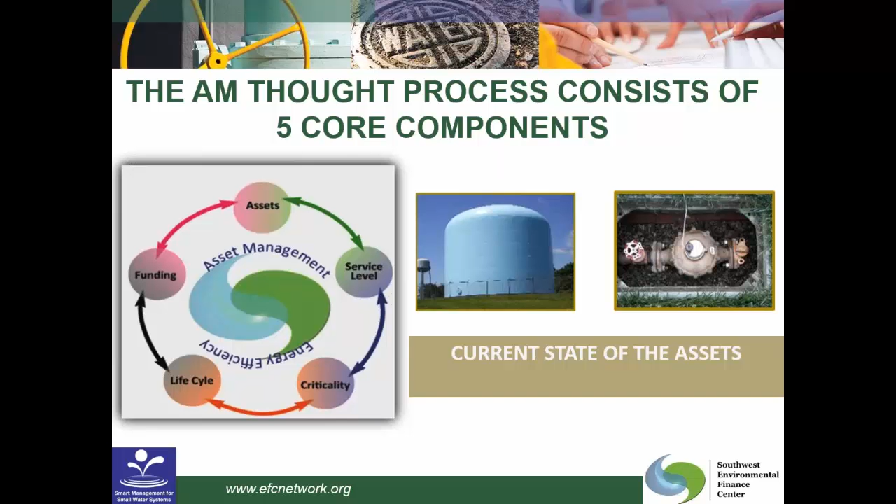The second core component of asset management is level of service. So when we think about a water utility, oftentimes we don't think about it in the sense that water utilities are customer service businesses. But we are. We're in the business of serving customers. So defining what levels of service we aim to provide to our customers is really very important. So defining those levels of service that the utility plans to provide defines the goals of the utility and how we're going to operate. The goals allow you to communicate with your customer.

Part of that communication should include the explanation that if the customer desires a higher level of service, typically the costs are going to be higher. The two are directly related. The level of service becomes the utility's roadmap, guiding you in your decision making. So as you set the goals and as you know what your targets are, when you're making decisions about where to spend your money, about how to operate your system, these goals are going to put you in the right direction.

And when you're defining your level of service goals, we like to say that they should be SMART goals, with the acronym of SMART. So specific, measurable, attainable, realistic, and time-bound. This will allow you to track your progress towards meeting those goals and to be able to report the progress that you're making to your decision makers, to your funders, to your customers.

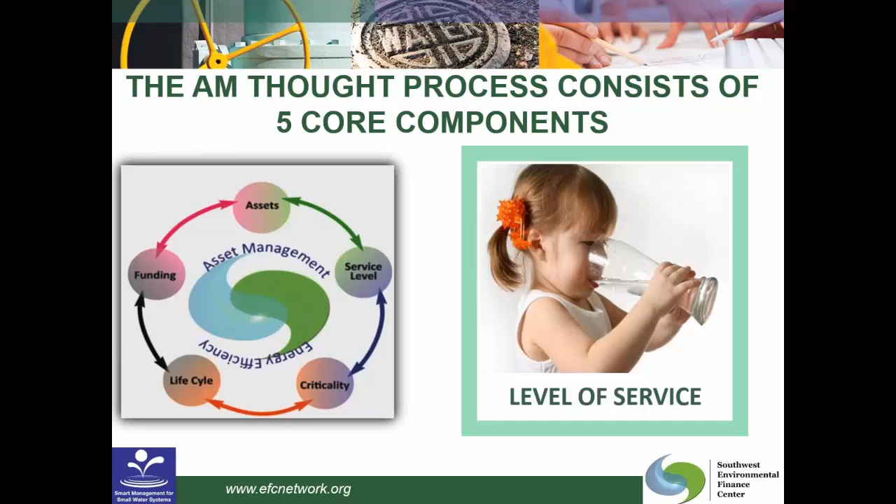The third core component of asset management is criticality. So we know that not all assets are of equal importance to our utilities. Some are very important to operations and some are not. So for example, a small water or wastewater pipe that serves a few houses is probably not going to be as important to a utility as the single pump that supplies the entire water system. If the single pump would fail, the whole town would be out of water. So it's important for each utility to determine which of its assets are the most critical.

When we talk about criticality, the two components that you want to look at are the likelihood that a given asset will fail and the consequence if the asset were to fail. So whenever we look at those two questions, we have several considerations that go into the determination. So for likelihood of failure, we would want to consider things like the condition of the asset, the age of the asset, repair history, historical knowledge, operation and maintenance history.

And then for consequence of failure, we would want to consider the cost of the repair, the social impacts, costs associated with the failure, cost related to collateral damages, legal costs, environmental costs, reductions in level of service, and any other costs or impacts that are associated with the failure.

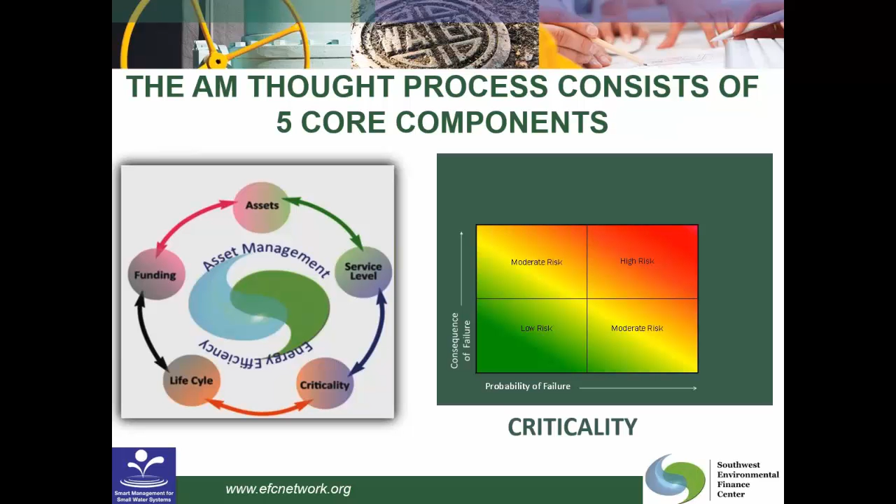You can reduce the consequences if you have redundancy in your system. If there are redundant assets, if one asset fails, another one's there to fill in for it, so to speak. So in this manner, the consequences are reduced because the failure of one of the assets won't cause a significant problem. And we'll be talking about the considerations that go into determining asset risk more here in just a few minutes.

The fourth core component of asset management is lifecycle costing. So traditionally, whenever a utility looks to replace an asset, only the capital cost or the cost to purchase that asset is considered. But there are other costs that the asset will cause over the life cycle of that asset, and those costs typically aren't considered, but they include the cost to operate the asset, to maintain it, to repair it, if any specialized training is needed, so on and so forth.

So analyzing life cycle costs helps you know when to continue with maintenance and repair efforts, and when to take the significant cost of investing in a new asset. So we don't want to spend too much by doing more of maintenance or replacement than we should. We want to try and balance those out. So a lot of times we're actually not doing maintenance at all. Our funding is limited and maintenance tends to get cut from the budget.

If your utility is not funding any type of maintenance, you've put yourself into a completely reactive mode waiting for something to break. And it's been shown that if you're operating in reactive mode, you're actually operating in a way that's costing you 3 to 4 times more than if you were performing maintenance. So it's possible to justify putting maintenance back into your budget. And as you go through asset management and you look at the costs, it will become very apparent that investing in maintenance is a wise decision.

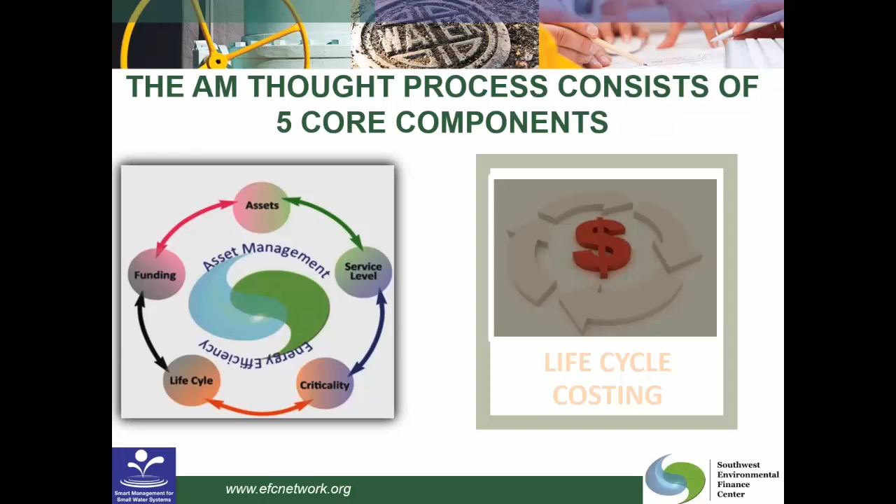It's not possible to have a system that's 100% planned maintenance and no reactive, as ideal as that would be, but a good goal is to be about 70% proactive and about 30% reactive. So I have a question I'd like you to consider. If an airplane was maintained the way you maintain your water facility, would you fly in it? If you answer no, think about why that's the case. Maybe we're not doing enough maintenance.

The final core component of asset management is long-term funding. Once you've determined what assets need regular maintenance and replacement, you have to determine how you're going to pay for those items over the long term. You have to determine your funding needs for your day-to-day expenses, for your operations and maintenance, and for your long-term capital expenses for your large replacements. And then you have to determine where that money is going to come from. So the money can either come from internal sources, your rates and fees that you charge to your customers, or from external sources, and those would come in the form of grants or loans.

So the EFCN has several funding tools and resources available on our website, and the web address is shown at the bottom of every slide. These include funding tables that list funders for water utilities by state, and then there are several other tools and guideline documents. There's the Financial Health Checkup for Water Utilities tool. There's a Plan to Pay Scenarios to Fund Your CIP tool, Water and Wastewater Rates Analysis Model tool, and Designing Rate Structures that Support Your Objectives, which is a guidance document. And there are several other references and resources available on the website specifically about funding.

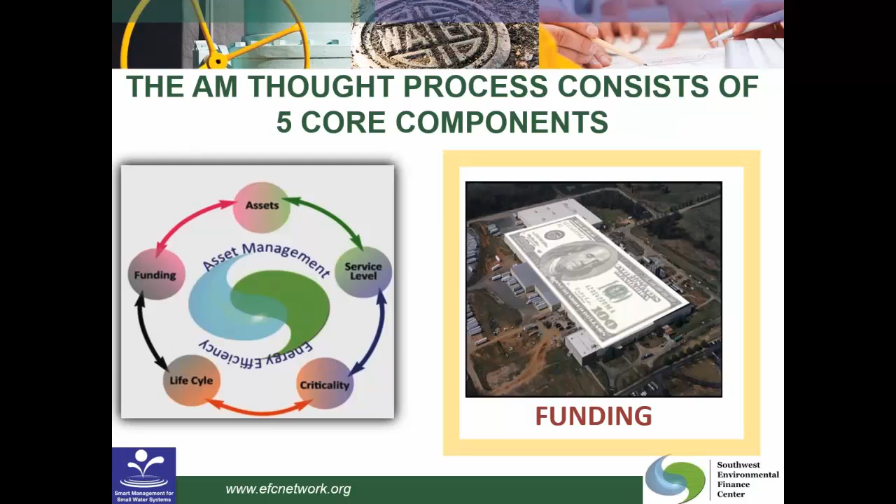So now that we've taken a quick overview of the 5 core components of asset management, we'll get into our risk analysis discussion. So you have an inventory of assets. You have any number of assets that you have to take care of to keep your water system functioning. You have a limited budget, and you have limited resources to deal with those assets. So how do you pick which activities you should do first? How do you prioritize? You have to determine which of the assets are most critical. But how do you go about doing that? You use your risk analysis.

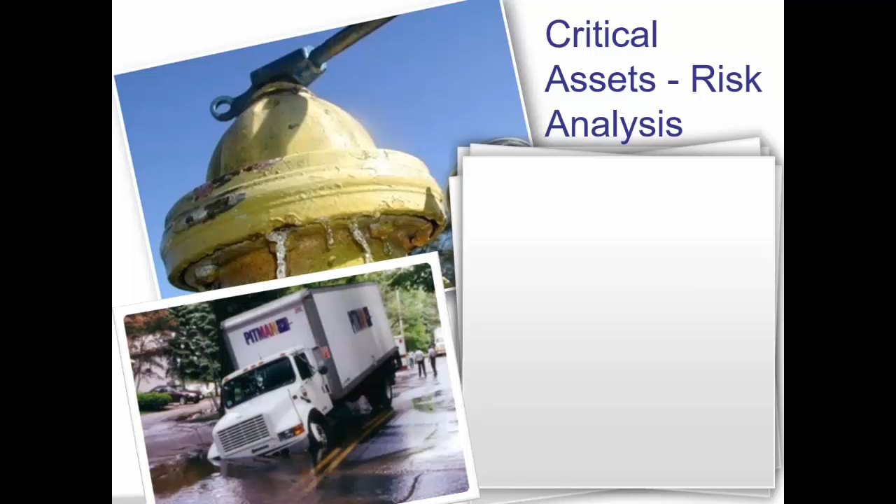Each utility should determine what your critical assets are. So when you're doing that, you have to ask yourself those 2 questions. How likely is it that the asset will fail? And what is the consequence if the asset does fail? So if you look at the 2 pictures that are shown here, you can pretty easily start to answer those questions for the asset shown.

So for the first picture of the fire hydrant being opened, if you asked, how likely is it that that hydrant is going to fail? You would pretty quickly have an answer: definitely, or it already is failing, or very likely to fail.

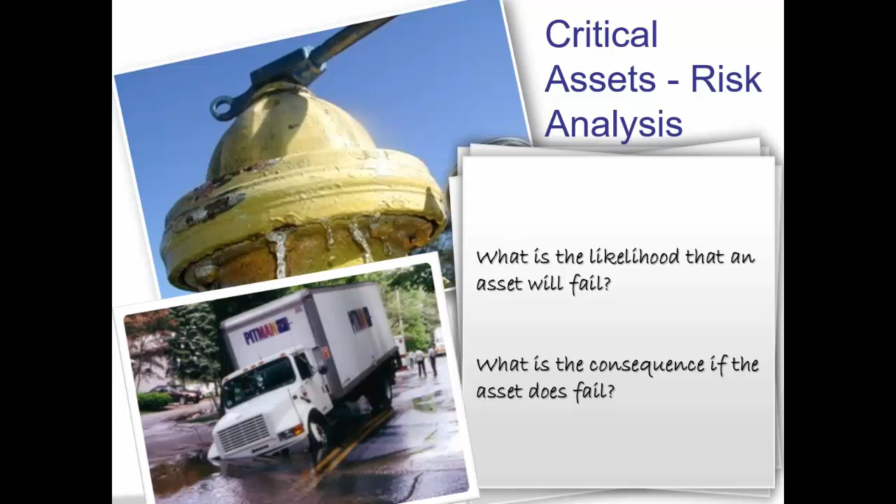And then if you look at the second picture, you can see that there's a truck in a sinkhole caused by a leaking water line. So if you ask the question, what are the consequences of that water line failing? You'd probably have a pretty quick answer for it too. You would want to know about the financial cost to the utility, the social cost to the utility, and the environmental cost. All of those would be important to consider.

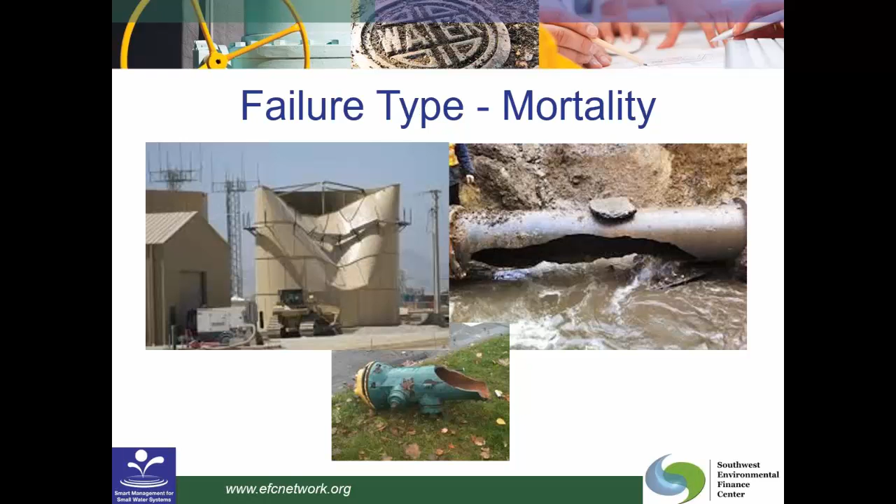There are different ways that an asset can fail, so we want to think about each of those categories when we complete our risk analysis. So we'll look at the 4 different areas. The mortality failure is probably the most common type, or what comes to mind most often. Things like leaks, stuck valves. This is where something physical happens to the asset and it fails because of a physical problem. So I've got some pictures here that are pretty extreme cases of mortality failures, but there are many other types of mortality failures that we come across.

And then there's level of service failures. This would be related to a change in regulations and customer demands or customers' desires. So in this example, the customers want fire flow, but they currently have 4-inch pipe, and you would need to put in 6-inch pipe. So you may be replacing perfectly good pipe, but it's failed because it cannot meet the level of service demands. So you would be replacing it with 6-inch pipe or larger.

Or for another example, a well has arsenic and it cannot meet the regulations, so you decide to abandon that well for another well. So even though this well is capable of producing water and meeting flow demands, it does not meet regulations. So you abandon it for another well with lower levels. These are level of service failures.

Capacity is a third type of failure. So this is where an asset's not able to deliver something like the flow that you want. The pipe could be in decent shape, but not delivering the flow that you need. So that's a capacity failure.

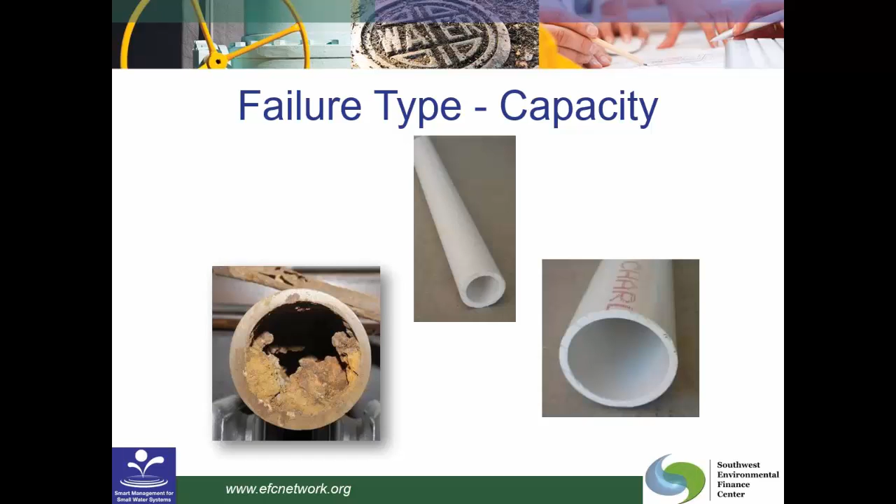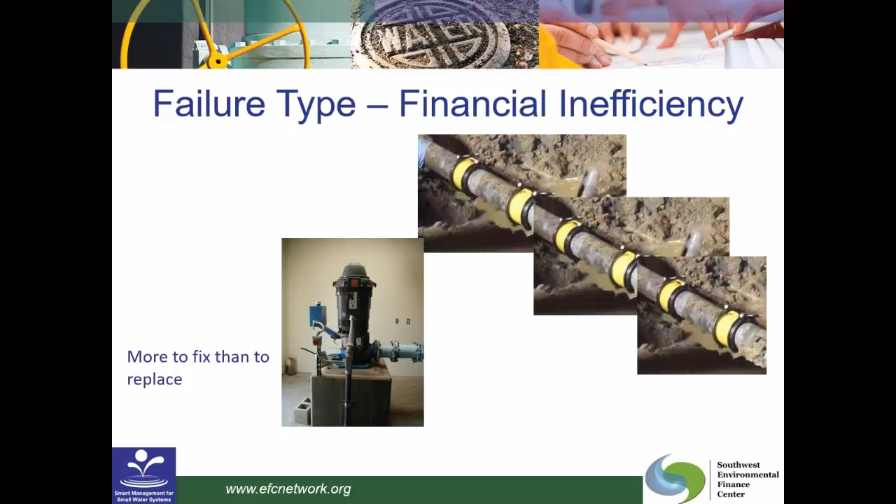And then financial inefficiencies. This is where we're spending too much money to continue to operate and maintain the asset. It would be cheaper to go ahead and replace it. So typically it's cheaper to do maintenance than replacement, but there does become a point in time where that's no longer true. So if you've got a pipe that's almost all clamped, it's probably time to replace that pipe. Or if you have a pump that's been band-aided more times than you can count, it may be time to go ahead and replace it. So these are cases where we're spending so much on operation and maintenance, it's time to replace the asset.

Then when we look at the question of what are the consequences if the asset fails, we want to consider the triple bottom line. We want to ask ourselves, what are the financial consequences, the environmental consequences, and the social consequences. And these can be quantitative, qualitative, or both.

So if we're looking at the financial consequences, we would want to think about how much is it going to cost us to repair or replace the asset? How much does it cost? How much damage was there to other assets, and what's it going to cost us to repair or replace those? Are there legal fees? Are there any costs associated with having to pay customers or businesses for damage?

When we look at the environmental consequences, we want to think about violations, fines, any loss of habitat, any loss of animal life, any impacts to endangered species.

And then when we consider the social aspects, if there's any loss of respect or confidence in the utility, the length of time that people were without service, reduction in business income due to the lack of service or repair work blocking the businesses. We want to think about safety and health concerns for the workers or the general public, any inconvenience due to blocked streets, and any reduction in level of service.

Once we have a probability of failure and the consequence of failure, we can rank those and we can calculate the risk. So you can use scores or rankings to calculate the risk. Probability of failure and consequence of failure could be given a ranking of 1 to 5 or 1 to 10, with 1 being very low and 5 being very high. And then you can multiply those scores together and come up with your risk ranking.

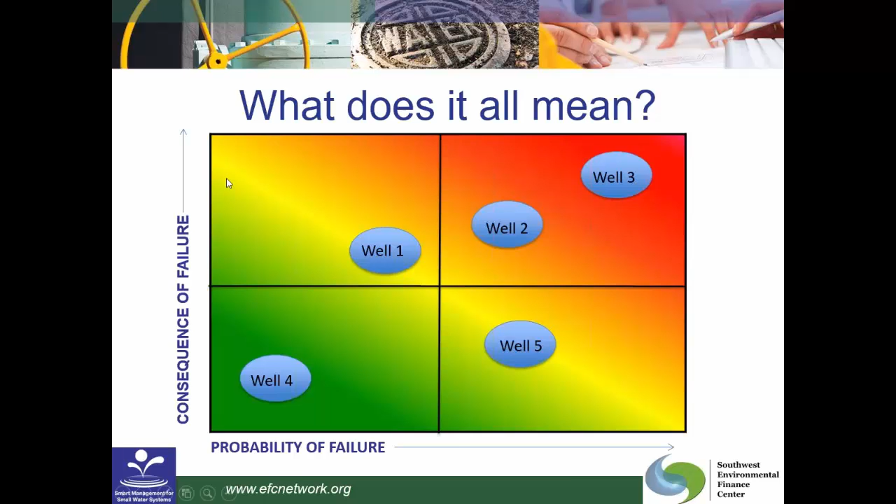So you can use this graph to guide your decision making in many areas. So risk analysis should be the guiding factor on where to spend, and what routine, preventative, predictive maintenance you should be doing on each asset. Low-risk assets should probably receive some routine maintenance, but not much preventative and probably not any predictive maintenance. On your moderate risk assets, you probably want to do routine maintenance and preventative maintenance. And on your high-risk assets, you would probably want to do all three types of maintenance because you want to do whatever you can to prevent failures on those high-risk assets. If you think of expense, the cheapest maintenance is routine, the preventative is next, and predictive is usually way more expensive. So it only makes sense to do the most expensive maintenance on the highest risk assets. In the same way, the risk analysis will guide your decisions when setting your budget, looking at your long-term capital improvement plan, and determining when and how much to adjust your rates.

And how to optimize your system operations. So things like frequency and location of line flushing. Maybe before asset management, you were flushing once a year at the ends of the lines. But when you get into asset management, it looks like there would be benefit to rotate around the locations and maybe to open a hydrant closer to the middle of the system and not at the end of the line mid-year, and then flush at the end of the line at the end of the year, something like that.

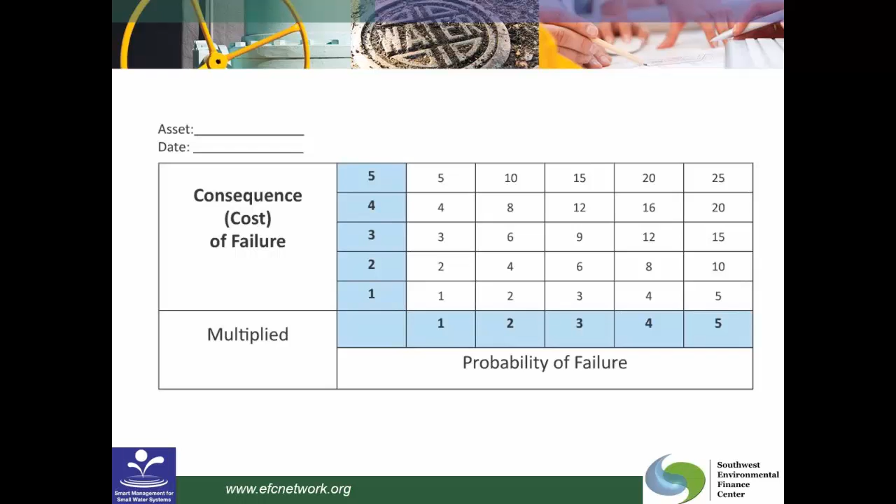And you can track which asset you've done the risk analysis for and the date that it was completed. You can make notes on these pages. You can add information. All of this is available to you to use at your utility and to add to or take away from as you see necessary. Also in the appendices, there's a graph that can be used to place the scores for the various asset categories. So each of these tools is there for you to use as you see fit.

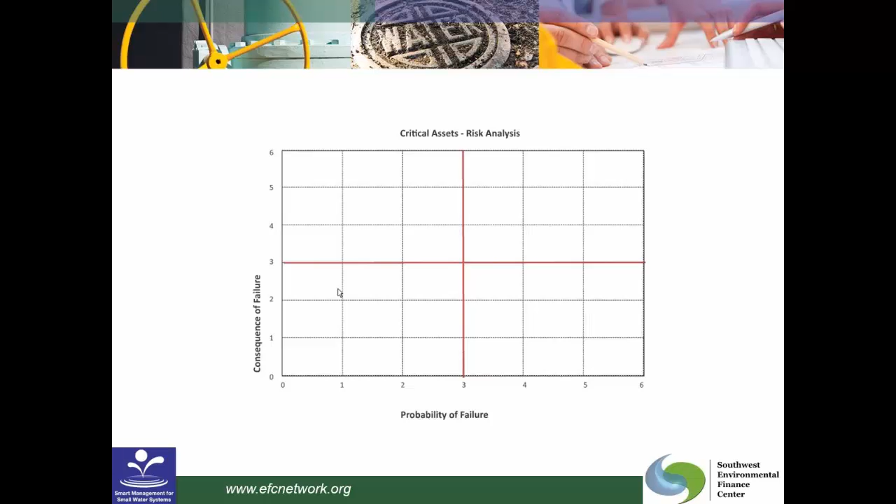There are tools for all of the core components of asset management in the guidebook. So if you download the manual, you get all of those tools, not just the risk analysis tools. Also, we've developed a new tool and updated the inventory reference guide. We've added to it. So we have a reference guide for asset management, inventory, and risk analysis. So we want to help you get started when you're looking at completing an inventory and also when you're completing your risk analysis. So there are several places that you need to go to look for information about an asset, different types of information you want to collect.

So when you look at this tool, the first table on each page will guide you in the type of information that you want to collect for the asset category listed. And then the second table on each page will provide you guidance on the factors you should take into consideration when you're evaluating your probability that the asset will fail and the consequence if that asset were to fail. So the lists are meant to get you started. They're not exclusive. There's likely other things that you will come up with that you want to add to your system.

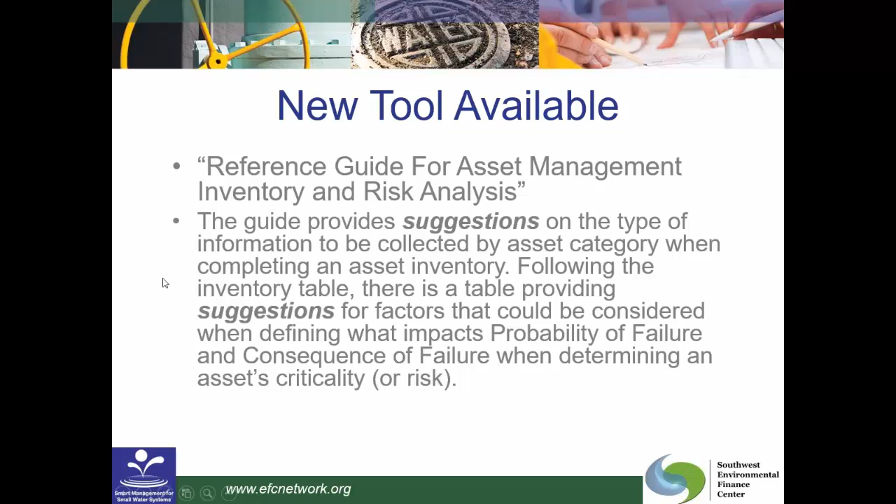So for example, just recently, I'm working with a system on completing a risk analysis, and one of the factors that they wanted to consider for pipe was if the road that was above the pipe was on the resurfacing schedule in the next 2 years. So that's a factor they wanted to consider that's not on my list. So I'm sure that there will be things that you come up with, but this is a way to get you started, get you thinking about things to consider as you're ranking the probability and consequence of failure.